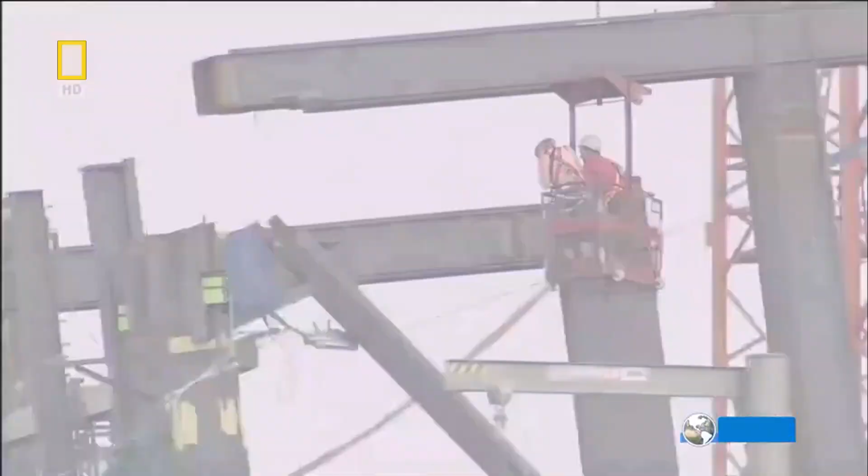Berlin, Germany. A construction team races to finish the largest train station in Europe before next summer's World Cup comes to town. To meet this deadline, 2 massive steel towers must be tipped over their new glass station in under 3 days. It's an engineering feat never before attempted. Can this team of engineers get this daring plan to work?

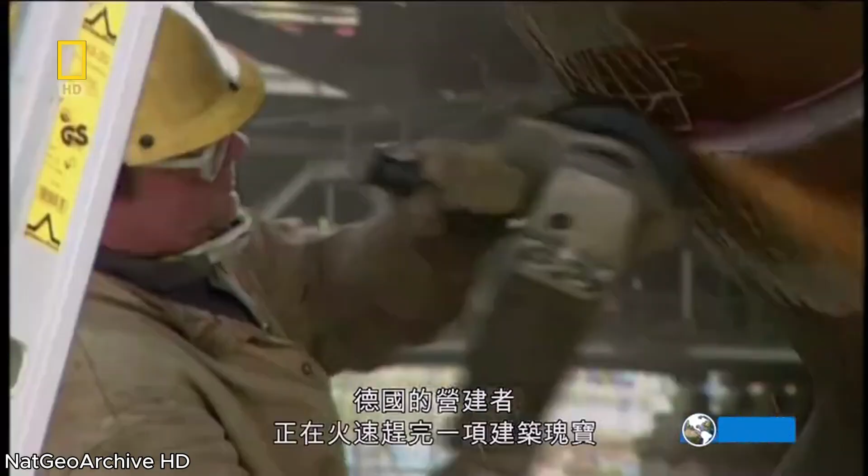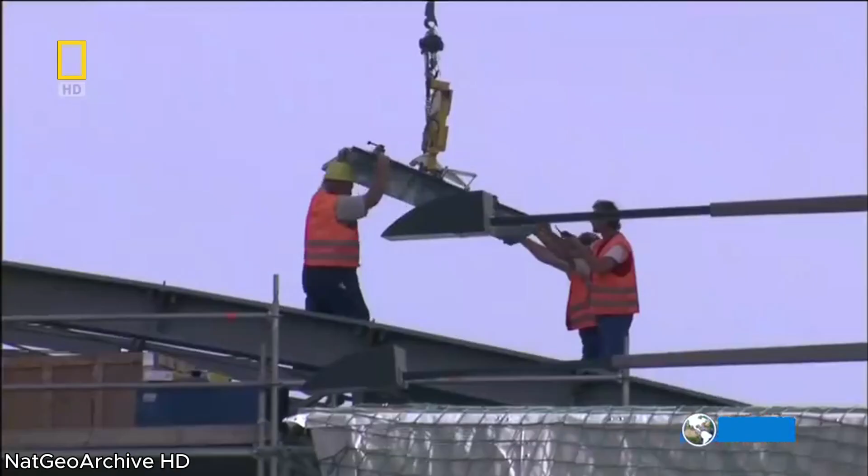In Germany, builders are racing to complete an architectural crown jewel. They've labored for over a decade, confronting one disaster after another. When finished, this will be the largest train station in Europe. 7 levels containing a staggering 180,000 square meters of space. Nearly as much space as the Empire State Building.

Even more amazing, 2 office buildings will straddle the station, both standing 14 stories tall, with 4-story high bridges suspended just above the glass and steel roof of the station. The price tag? Over 4 billion euros and counting. Financed by the Deutsche Bahn, the German rail company and the government, and designed by a world-famous architect, the project is intended as a bold statement. If it works, it will literally and figuratively reconnect East and West Germany, ushering in a new era of unification.

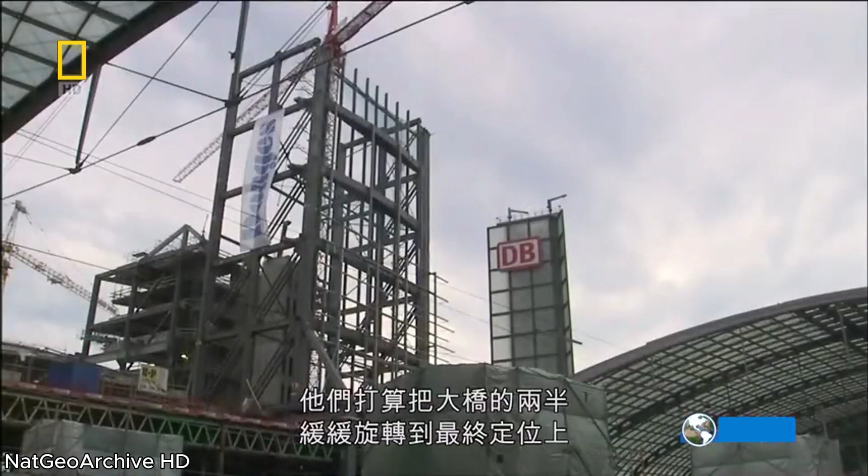But the project has faced terrible setbacks. It's years behind schedule and billions over budget. To make matters worse, the architect is suing the developers for cutting corners on his design. Soon, the project will be coming to a head. The builders are about to execute a move never before attempted in the history of construction. They will attempt to gently pivot these 2 massive halves into their final position, forming a steel bridge just 2 meters above the station roof.

It's a terribly risky scheme. If anything goes wrong and the bridge sections hit the glass roof below, the project would suffer unthinkable damage, and the cost would go up by more millions. Will Berlin's new central railway station ever be finished?

Since the 1989 fall of the Berlin Wall, Germany's capital city has undergone a frenzy of rebuilding in an attempt to reclaim its historical place as the cultural and economic center of Europe. What better way to solidify that role, planners thought, than with a truly world-class rail station? As the centerpiece of a completely rebuilt transportation system, the station would not only relink East and West Germany, but all of Europe, by connecting Paris with Moscow and Stockholm with Vienna. Berlin, of course, would be at the center of it all.

But today, 5 years after its original scheduled completion date, the project is still under construction. And it's reached a critical moment. Down on the streets, crowds begin to form. They've come to watch an unfolding drama. A milestone event in the history of construction engineering. The fate of the entire project hinges on this step.

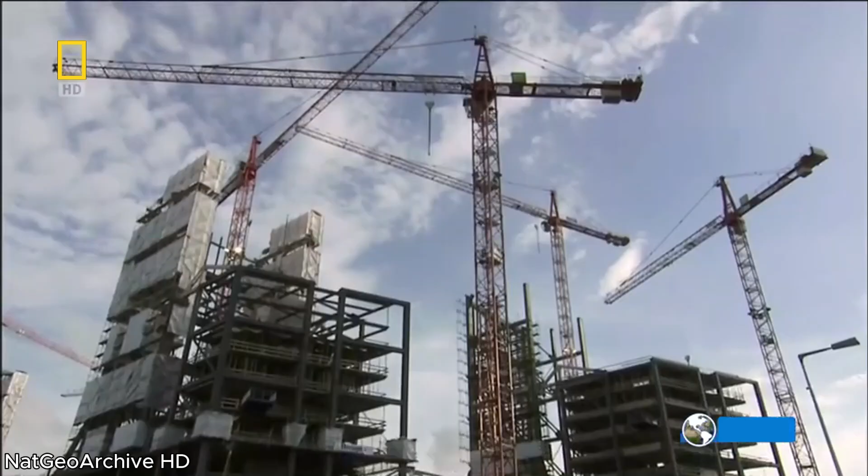Up in the air, a team of specialized engineers and workers are preparing to execute a dangerous maneuver. Scaling the steel like mountain climbers, workers make their final adjustments. Check and double-check hundreds of details. All eyes are now focused on a pair of huge steel bridge sections. When finished, they will form a bridge, 4 stories high, hovering just above the roof of the train station. The bridge will join the 2 sides of the office building and will itself contain thousands of meters of office space.

Because building a working train station was the top priority for builders, the twin office towers would have to be built after trains were running through the nearly completed station. One of their original ideas called for building the bridge the usual way, starting at one side and building out horizontally over to the other. But engineers realized that building the bridges that way was too dangerous. Safety officials lay awake at night at the thought of cranes swinging these huge steel girders above their new glass-roof train station, packed with thousands of commuters. They'd be forced to shut down train services over 6 weeks until the bridge was done. But that would have brought Berlin to a standstill.

So engineers came up with a remarkable solution. They would build the bridge in halves. Each half was built not out, but up. Now the 2 halves are ready to be lowered into place with cables. The tipping technique has never before been used in an urban setting. But now, there's no turning back.

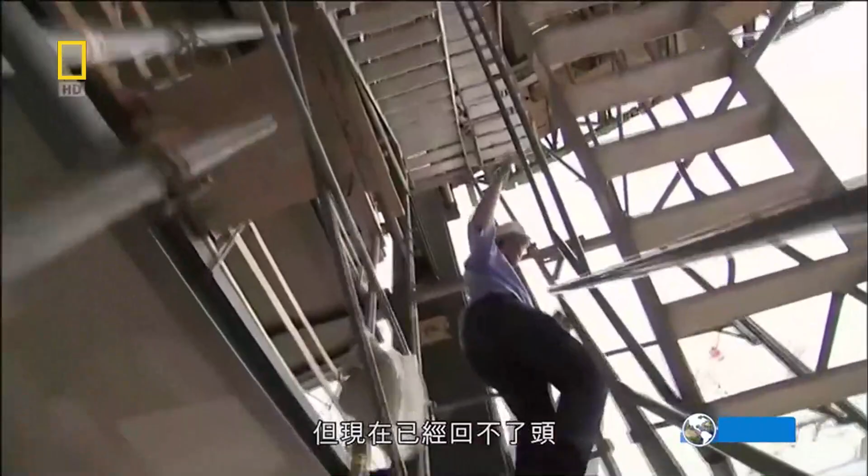Starting at 10 tonight, train services through the station will be halted. But only for the weekend. They'll have 54 short hours to get the bridge lowered and the sections attached. But each section weighs over 1,200 tons. If something goes horribly wrong, it could mean the total destruction of the station's spectacular new glass roof. It has one of the largest glass roofs in Europe.

Over 11,800 individual square panes. Each pane weighs almost 100 kilograms, bringing the total weight of the glass alone to 1.2 million kilograms. That's a lot of glass.

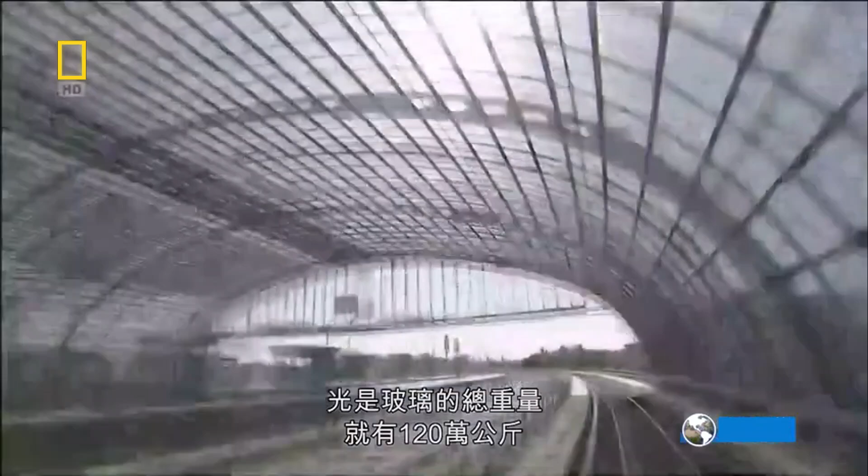World-famous architect Meinhard von Gerkan knew from the beginning that he wanted glass to play a prominent role in the station's design. The most important thing for a public building is to have the impression of daylight. You feel much better if you are part of the total environment, the natural environment.

As it happens, big glass structures are all the rage in Germany right now. When the Reichstag, the German parliament, was rebuilt in 1999, the government insisted on installing a glass dome on top to reflect the new German transparency. Glass has traditionally been a material of choice for train station designers, but it's always been expensive and tough to work with.

Early train stations with glass also needed immense support structures of steel to hold up all that heavy glass. The result, in spite of the glass, not much natural light could get in. The stations were still pretty dark. Von Gerkan wanted to do better.

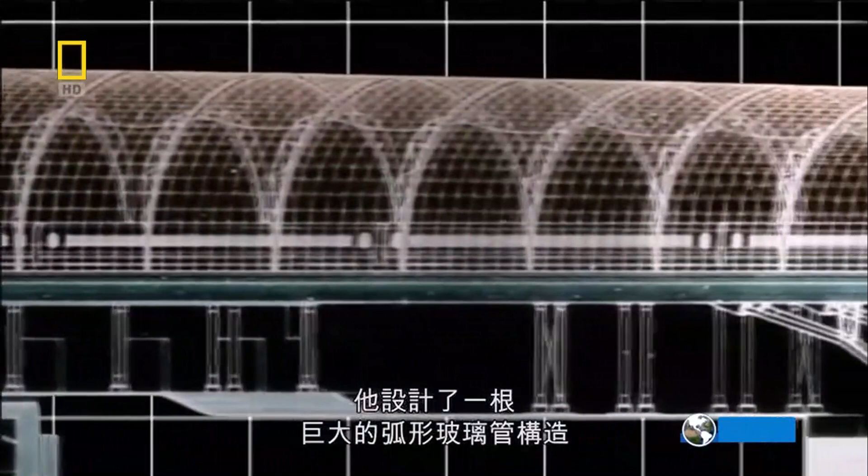His design called for a massive curving glass tube, 16 meters high, 60 meters wide, and over 400 meters long, to form a nearly transparent roof and walls for the main platform. He needed to find a way to eliminate all that steel, to have the glass support itself, or at least appear that way. But a glass structure can be as dangerous as it is beautiful.

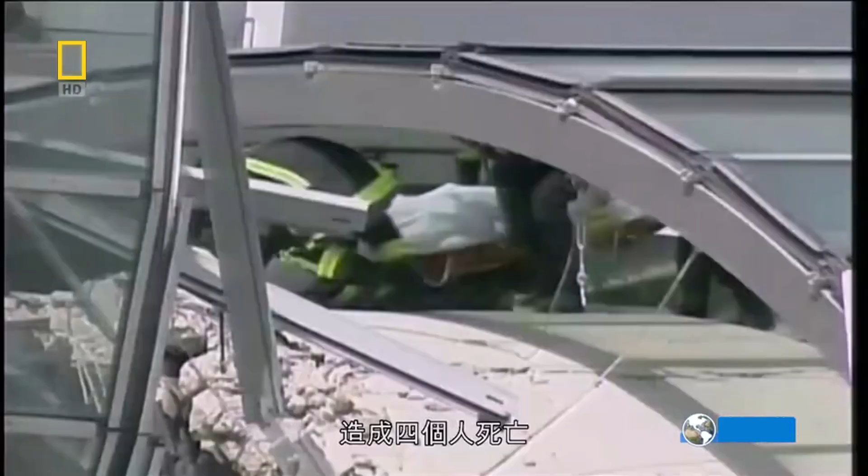In 2004, almost a year after its opening ceremony, a brand new glass terminal at Paris's de Gaulle airport suddenly collapsed, killing 4 people. Investigators pointed to both design flaws and construction defects.

Now, with just hours to go before the crew here in Berlin attempt one of the most unorthodox construction tricks in history, the possibility of disaster cannot be far from anyone's mind. It is the ultimate challenge for a project that has missed one deadline after another. Today, a new deadline looms, and the teams know they can't blow it.

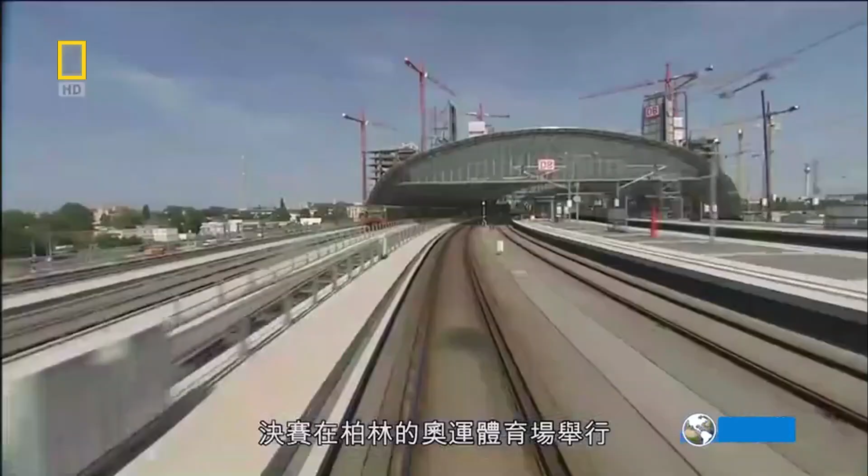Mid-next year, the World Cup football tournament will focus the world's attention on Germany, the most watched sporting event in the world with an audience of billions, more than even the Olympics. Millions of fans from across the globe will flood into Germany, with the final game here at Berlin's Olympic Stadium. City officials desperately want the global event to also serve as the station's inauguration.

Berlin officials expect up to 3 million football fans to descend on the city. They desperately need the station completed, because once the games begin, nearly 500,000 fans will use it every day. If the project is still under construction, it will be a huge embarrassment for the country in front of an international audience.

All this pressure now sits squarely on the shoulders of the two men in charge of the operation. Olaf Severin will run the crew lowering the South Tower. Bernd Naujoks will lead the North Tower team. They go over the plans one last time. Years of preparation have led up to this weekend.

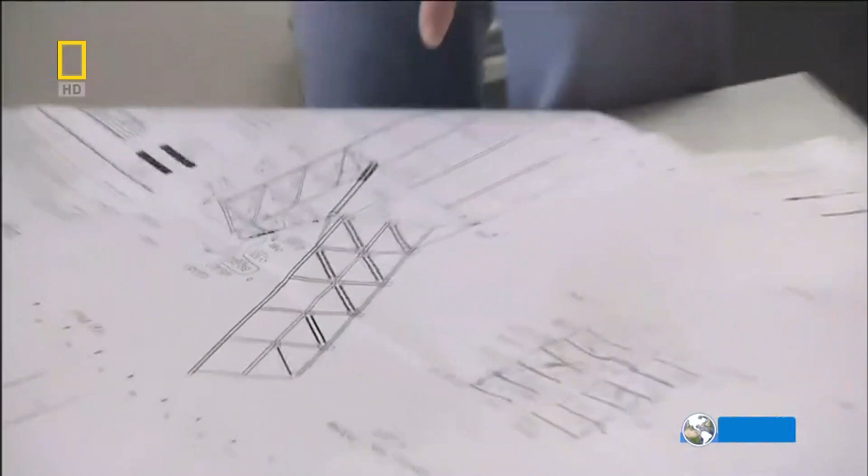At 10 tonight, all train traffic through the station will be halted. Olaf and Bernd must complete the work by 4 a.m. Monday, the start of rush hour, when the train schedule must resume. If they're late, Berlin becomes one huge traffic jam. Between now and Monday, neither one of them plans to get much sleep.

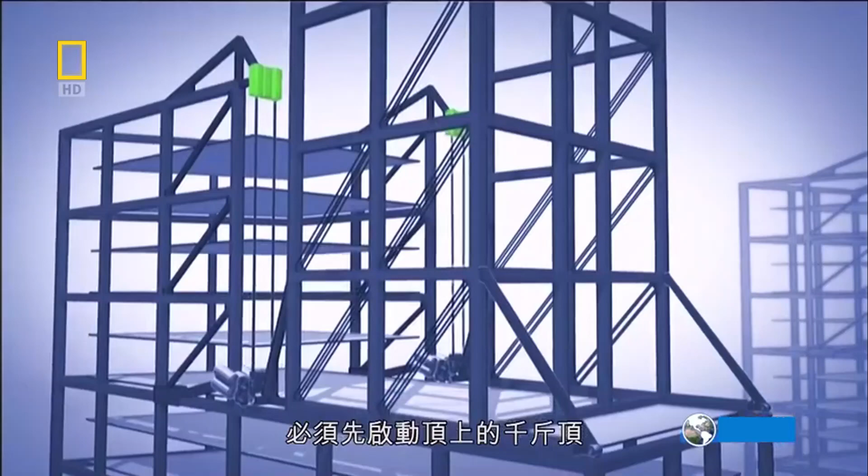On paper, the plan is simple. Each bridge section currently stands on its end. Both towers are fitted with 12 massive jacks, 4 on top and 8 on the bottom. To begin tipping the sections, the men will first activate the top jacks. These jacks pull up on a series of steel cables anchored to the tower, tipping the tower on a single pivoting hinge.

Once it reaches an angle of 15 degrees, it will start to fall. To keep it from crashing down, the bottom jacks are now activated. These jacks act as a brake, lowering the tower by slowly letting out a second set of cables, centimetre by centimetre. The two sets of jacks share the load until the bridge sections reach an angle of about 40 degrees. At that point, the bottom jacks take over completely for the rest of the ride.

A simple plan, but with years of experience, Olaf knows problems could spring from any direction. Snapped cables, misfiring hydraulics, high winds. So computers are on board to control the process. They can monitor the shifting weight, regulate the speed of the jacks, and shut down everything if they sense a problem.

Olaf and Bernd share final authority, and each of them knows that if they have to, they can override the computers. The two decide to make a bet on who will get to the bottom first.

One thing's for sure, Bernd. We will reach the bottom first. What? No. Let's bet a case of beer.

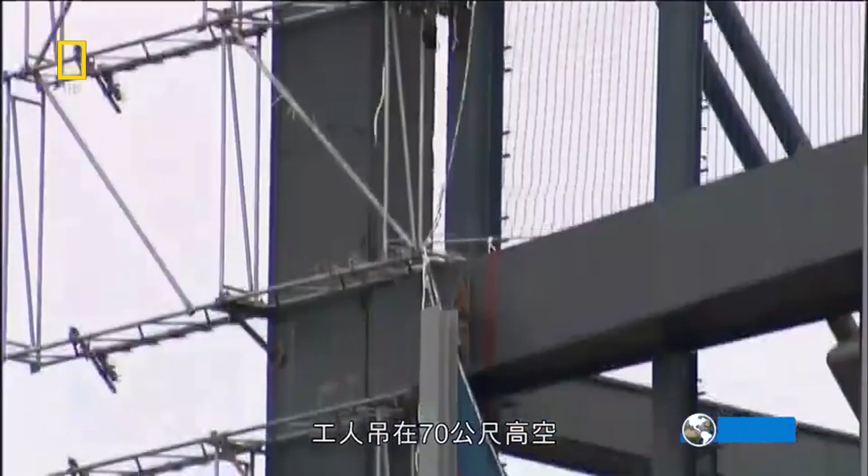But before the starting horn can sound, final safety measures must be finished. Workers dangling 70 meters in the air attach nets to the bottoms of the bridge sections.

The nets are supposed to protect the nearly 12,000 glass panels of the station roof, in the event that something falls from one of the sections during the tilt. Glass has been used in train station roof construction for over a century. But early builders were limited by the expense and fragility of glass. So builders kept both the size and the quantity of the panes they used small.

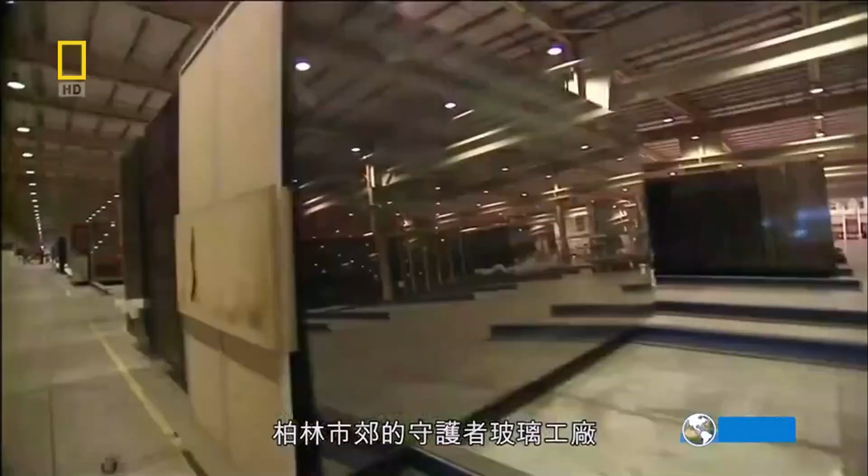Architect von Gerkan's design for the new Berlin station called for nearly 12,000 panels, each over a metre square. For such a vast quantity, project managers came here to the Guardian Float Glass factory just outside Berlin. Virtually all of the glass used in the station was manufactured here, using a modern method called the float process.

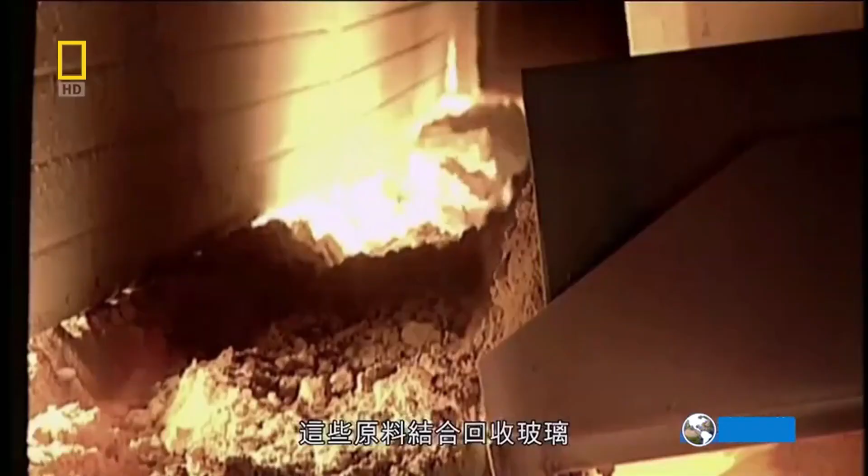Today's high-quality glass is made from a blend of raw materials, including silica, soda, and lime. These ingredients are combined with recycled glass and fed into a huge furnace. The furnace is heated to over 1500 degrees Celsius, hotter than volcanic lava. So hot, workers can only keep watch through tiny windows, wearing heat-resistant clothes and goggles.

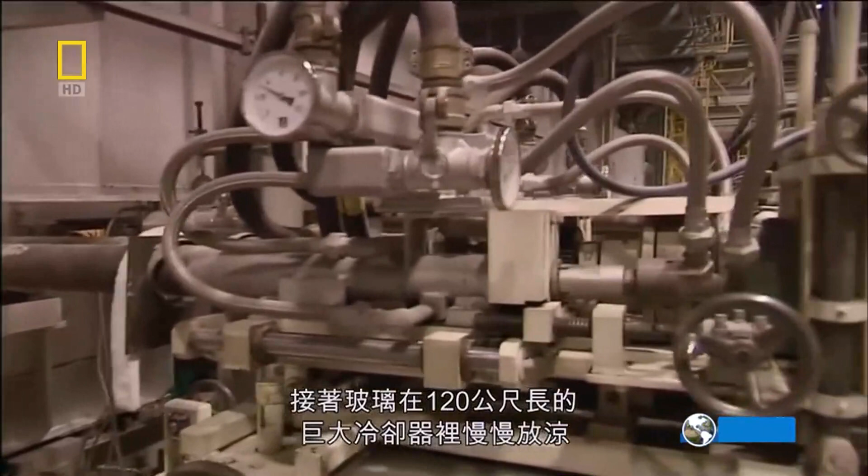The extreme heat inside the furnace melts the ingredients into a liquid glass. The glass spreads out over a layer of molten tin. Because the plane of contact between the two liquids is perfectly flat, the resulting glass will be virtually free of optical distortion. Next, the glass is slowly cooled in these 120-meter-long giant coolers.

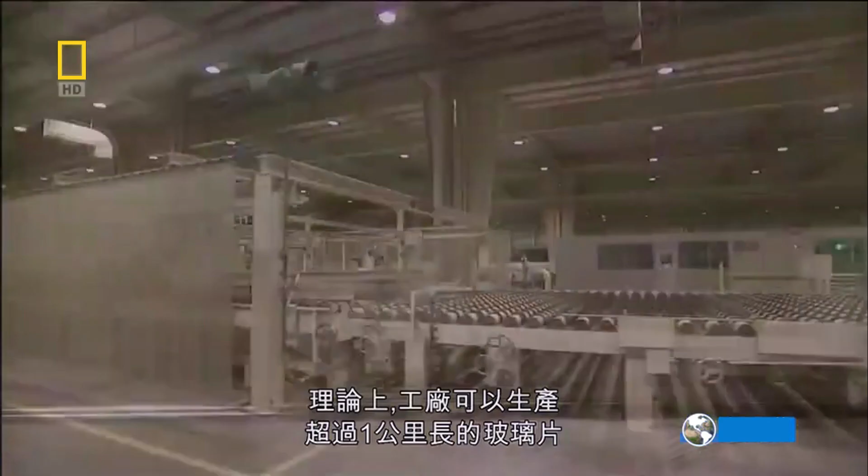This factory could theoretically produce glass sheets over a kilometer long, but they would be essentially impossible to ship. So each piece is then scored, cut to size, and trimmed.

But the glass panels von Gerkan needed for the train station needed to not only be large, but also extra strong, capable of withstanding bad weather and the constant vibrations from trains. So the glass for the station is tempered to make it twice as strong as normal window glass. As a final step, a layer of UV-absorbing material is fused with the glass. This step helps prevent the station from becoming the world's largest hothouse.

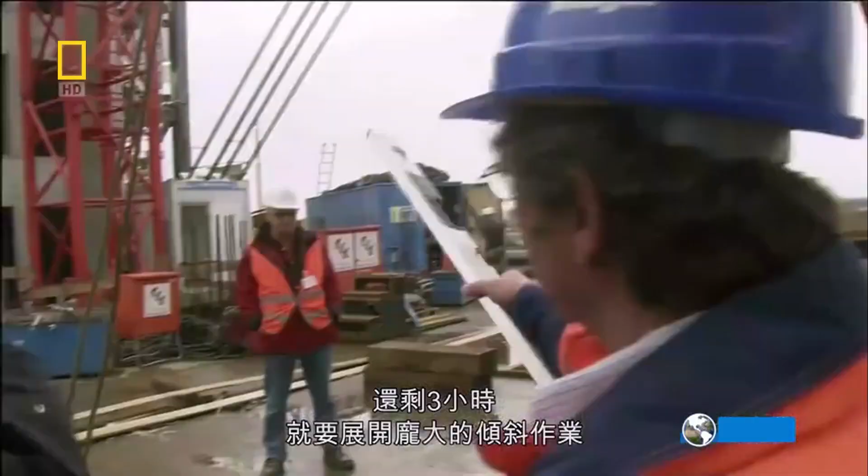Back at the construction site, there are only 3 hours left until the big tip-over is supposed to begin. Team leaders Olaf and Bernd are anxiously awaiting the signal that train traffic through the station has been halted so that they can begin the delicate operation. But now there's a new worry. The skies over Berlin are looking ominous, and severe thunderstorms are forecast. The two men know they must do everything they can to stay on schedule. The trains can only be stopped for 54 hours.

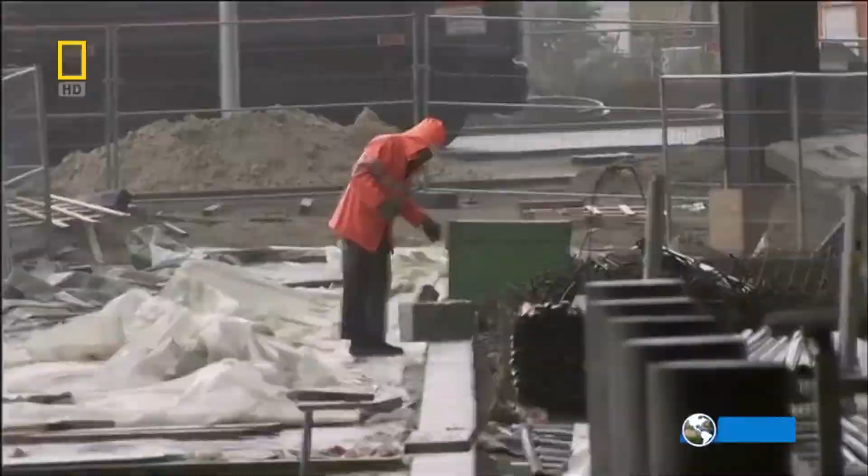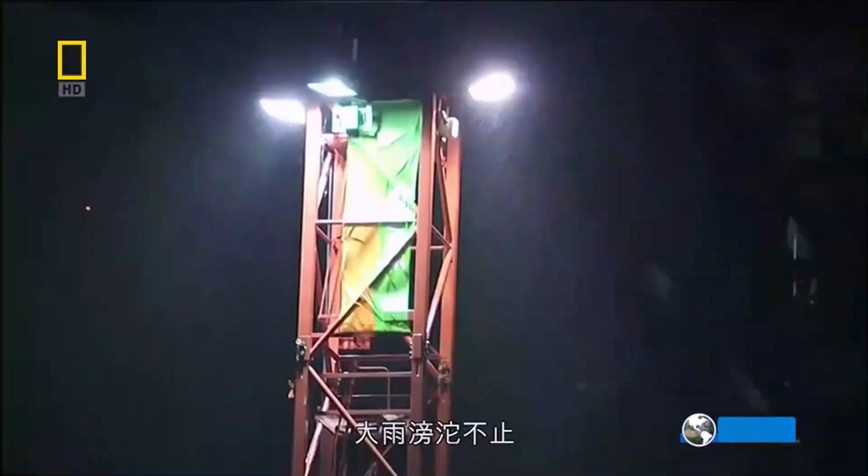But they can't put their men at unnecessary risk. If the conditions get too bad, they'll be forced to call off the procedure. As night falls, there's nothing to do but wait and hope that the storm blows over. 10 p.m. at the construction site of the massive Berlin rail station, and lightning is lighting up the sky all round. Rain is coming down in sheets, but the wind seems to be holding, so engineers make the difficult decision to proceed.

Lightning should not be a problem. The wind is starting to increase, but our static calculations consider such wind loads. After the last train leaves the station, the starting horn blares. Foreman Bernd gives the signal, and his North Tower team springs to action.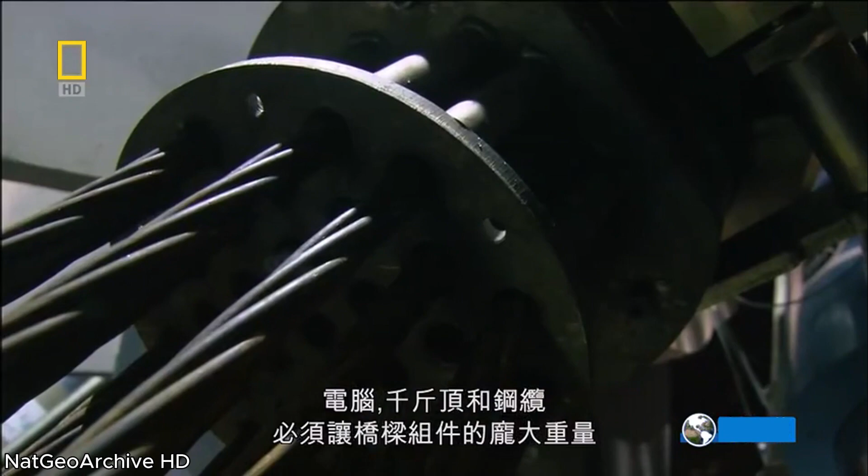The name of the game in this entire process is control. The computers, jacks and cables must keep the massive weight of the bridge sections under constant and complete control for the entire tilt. If they don't, the sections could jerk or start to sway, which could be disastrous. Of course, gravity will be doing most of the work. All the machinery and all the men are here simply to keep gravity from working too fast.

The scariest point will be the moment when the center of gravity shifts on the bridge sections. At that moment, the 12 jacks and nearly 400 cables will be pushed to their limit as they carefully lower the 1,250-ton weight of each section over the station. If the team can get past that changeover point smoothly, the rest of the ride down should be easy. The operation is the first time in construction history that two massive towers have been intentionally tipped over so much glass.

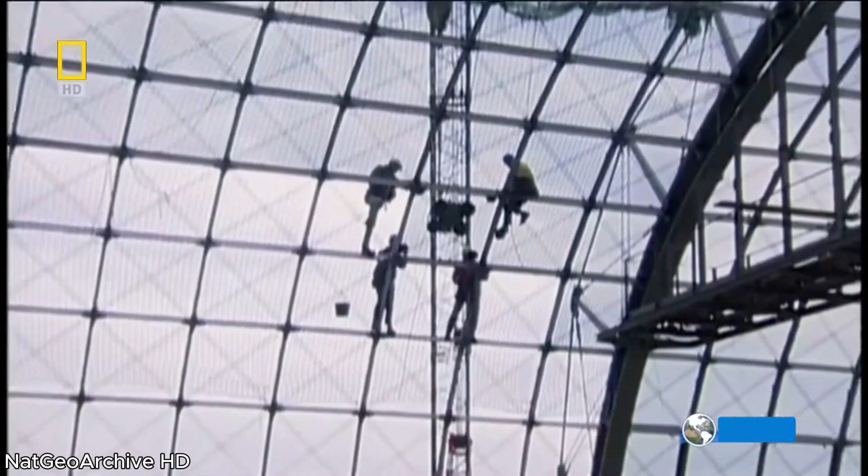It's taken months to place the thousands of glass panels. Each panel sits inside a perfectly sized steel square frame. This interlocking steel framing matrix is a crucial element of the design because the steel itself is so thin it almost looks like the glass is supporting itself. Architect von Gerkan wanted the station flooded with light, so he needed to find a way to hold up the glass with as unobtrusive a support structure as possible.

And he could not sacrifice safety. The structure needed to hold firm against constant vibration from the trains rumbling through below. Hundreds every day. Von Gerkan also wanted to avoid cluttering up the interior of the station with traditional support posts. So project engineers came up with an ingenious solution. An elaborate skeleton of external supports.

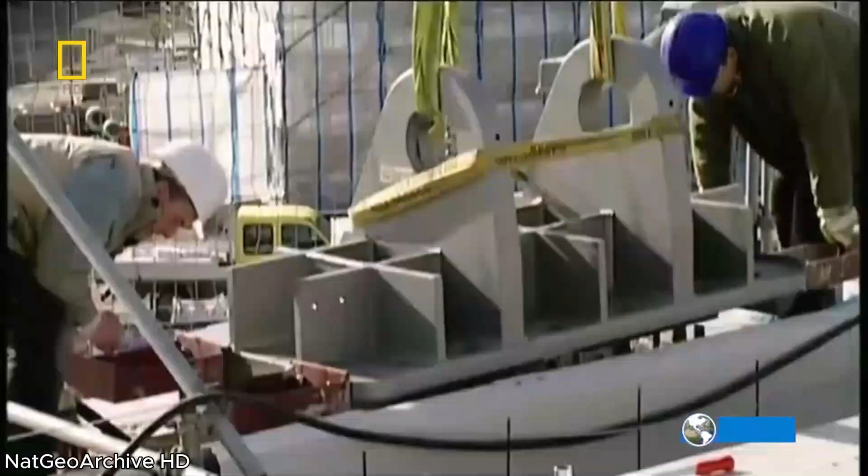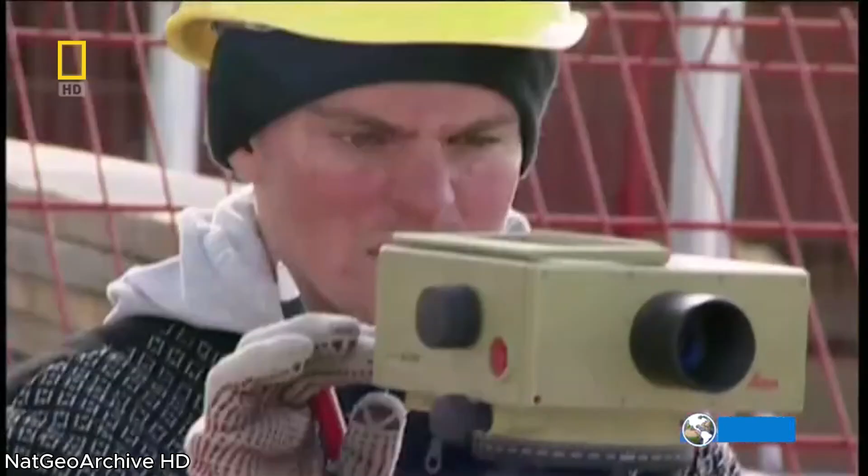This steel anchor joint weighs 4 tons, nearly as much as 2 SUVs. It's one of 46 identical anchors that, when placed and bolted, will serve as the primary support for the entire glass and steel lattice above. Each joint will be capable of holding almost 200 tons. Placement is critical. A surveyor carefully guides the team. Once the anchor joint is secure, cranes lower one end of an 11-ton end section of one of the station's arching main support beams.

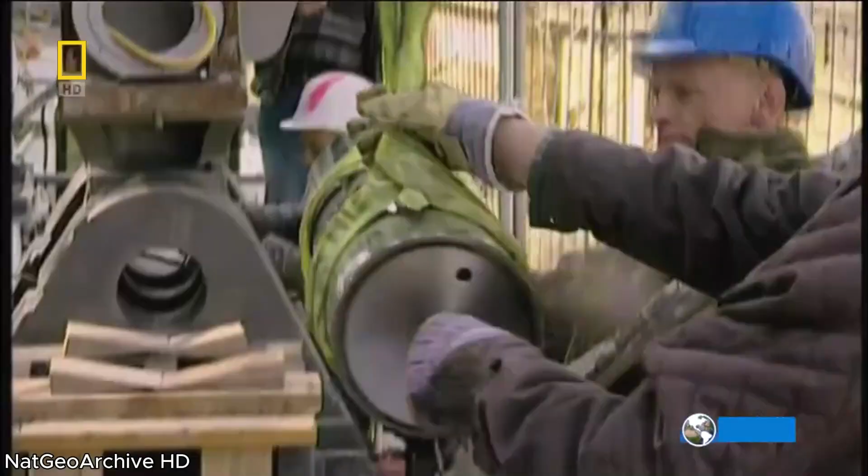It's not unlike the world's biggest door hinge. First, the crew carefully aligns the holes. Then a 300-kilogram steel locking pin is slid through the holes. This hinged joint will let the huge beam sections rotate as needed during construction. They will also let the entire structure expand and contract without creating wear and tear on the joints.

Once this end of the beam is locked into its anchor, the other end can be placed into an identical facing anchor on the other side of the station. Each complete beam is made up of 4 interlocking sections. The steel and glass latticework hang between these mammoth support beams.

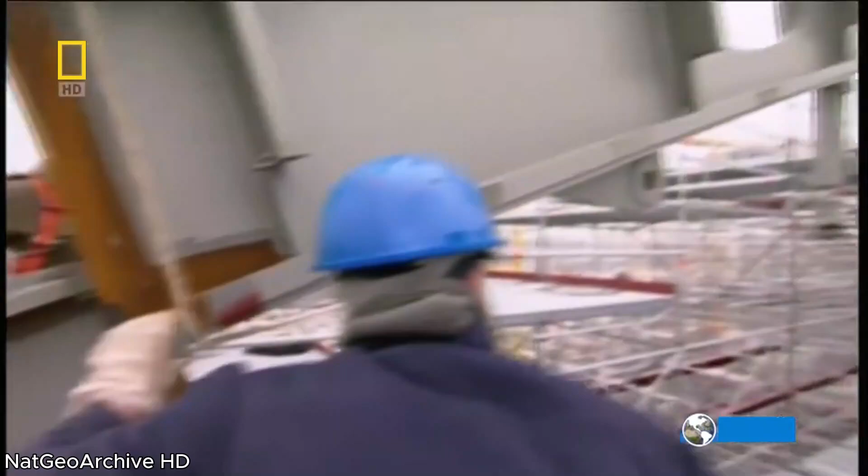After the last beams of the steel support arches are placed and welded, it's time to install the glass. Cranes specially fitted with suction cups gently lift one pane at a time to the crew. This part of the job requires calm hands, a steady nerve, and a delicate touch.

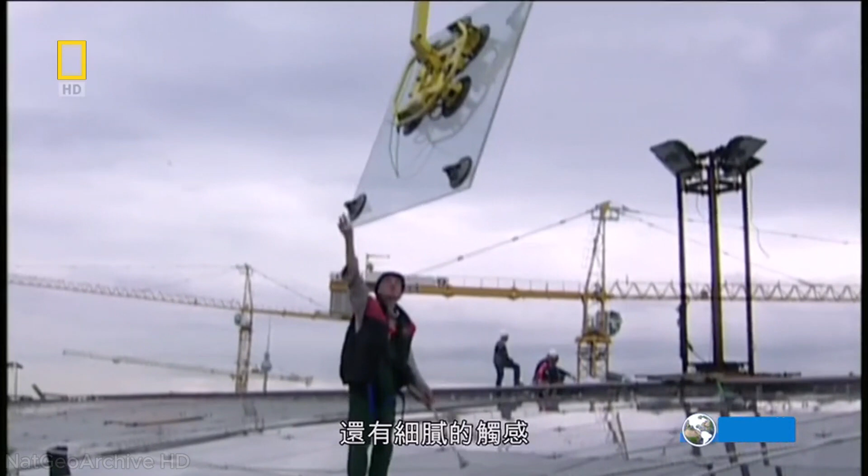Working 16 meters above the tracks, workers must stretch to receive the glass, and then stretch again while they dangle over the open steel frames. A spritz of glue, and the pane pops in. It took the crew working day and night for 4 months to install the glass to this point. Today, only a 9 square meter section remains to be glassed.

And while it's been all sorts of fun, nobody here relishes the thought of having to repeat this process. And that's just what they'd have to do if this station roof winds up getting smashed to bits by an out-of-control bridge section.

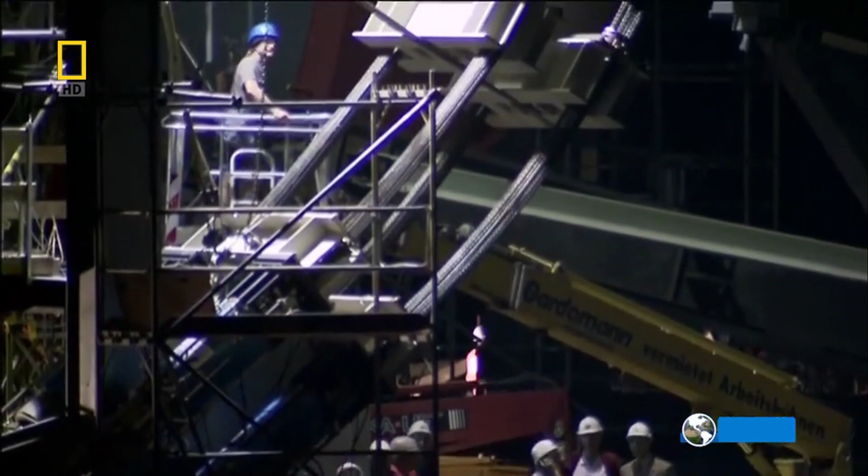Back at the tip-over, workers wait for the signal to start. Bernd calls from the control room. They flip the switch. The huge jacks spring to life, and the massive towers begin their slow descent, 6 meters an hour. As rain pelts the station, and all train traffic through the station remains stopped, workers check and recheck the tower's progress.

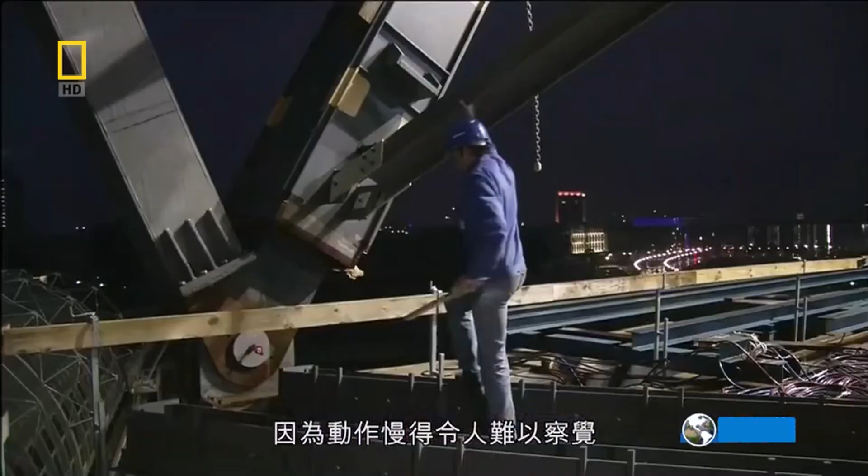Since the movement is almost imperceptibly slow, a simple ruler and bubble level provide assurance that the huge sections are indeed moving at all. Bernd's North Tower takes a slight lead.

One of their main concerns, the cables. If a cable binds or gets stuck for any reason while going through the jacks, it could cause the steel to jerk and sway. So workers armed with lubricant will keep that cable well oiled all night. Their crazy plan seems to be working.

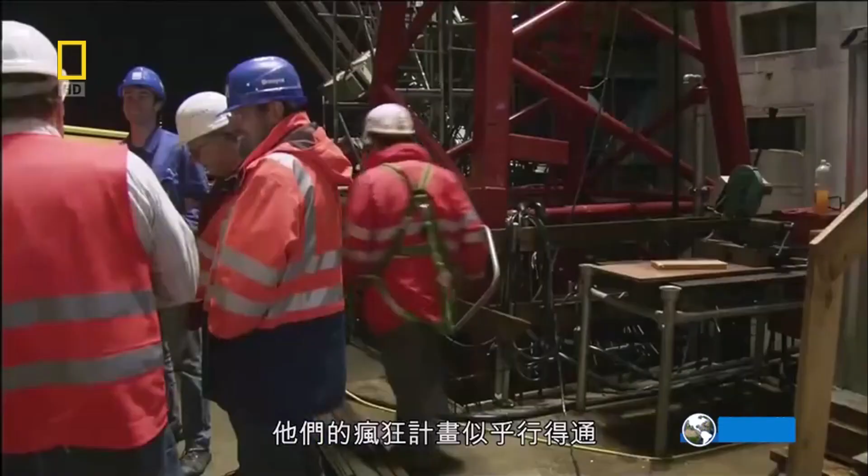Then suddenly, less than 2 hours into tilting, a problem erupts for Bernd's North team. The electronic signal coming from one of the jacks suddenly stops working. Without a signal, the emergency system kicks in. Tipping on the North Tower is automatically halted. Now it's a race against the clock and the weather.

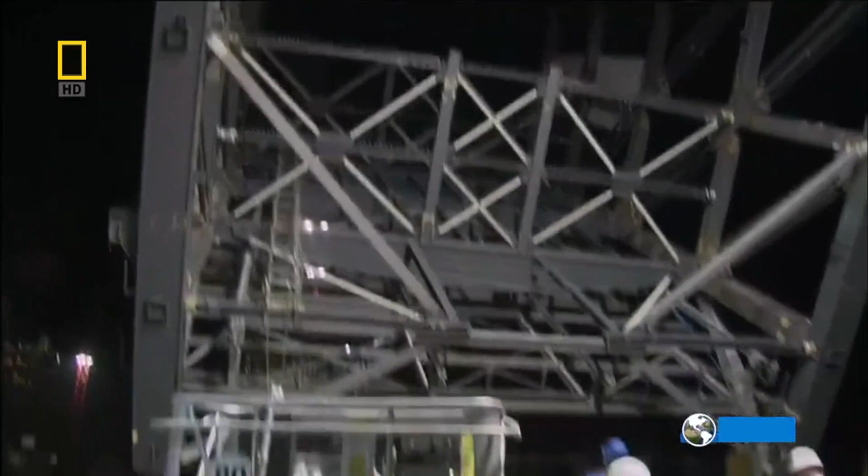Three hours ago, tip-over came to a sudden halt when communication between one of the jacks and the control room was lost. When working, the signal allows the computers to control the tower's every movement. Technicians believe the heavy rain shorted the line. It could take hours to fix.

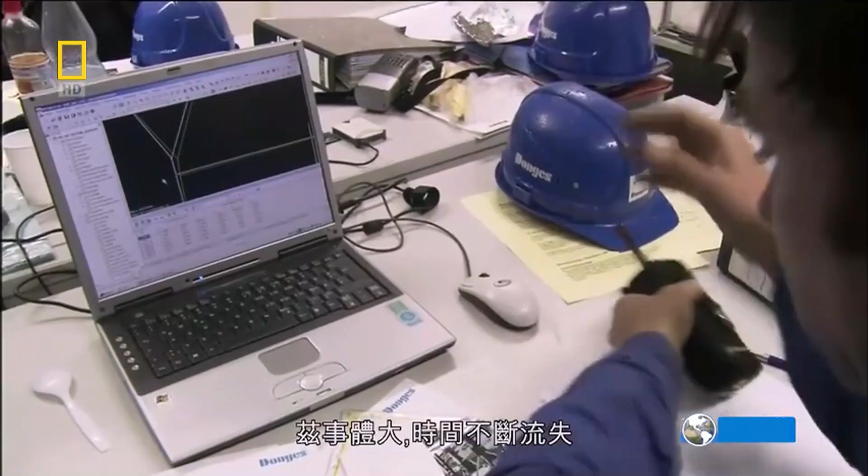Back in the office, team leader Bernd Naujoks makes a bold decision. With so much on the line and the clock ticking, he decides they can't wait for repairs. He tells his team to fire up the jacks once again.

Without the precise monitoring of the computers, engineers must monitor every centimeter of the tip-over, manually, with surveying tools and levels. One more job for an already overtaxed crew. Even the slightest miscalculation could spell disaster, but it's a risk Bernd feels he must take. Just another crisis for a construction project that has been plagued with problems.

From the beginning, one of their biggest problems was the location. To most people, these scenes are reminiscent of Venice. But this is Berlin. The city is built around 2 main rivers and countless smaller waterways. The water adds charm to Berlin, but it adds all sorts of complications to builders' plans. When you build a billion-euro mega train station, it's all about location, location, location.

The chosen location for the new station had once been the site of a majestic train station called the Lehrter Bahnhof. But that station suffered irreparable bomb damage during World War II and was then demolished in 1959.

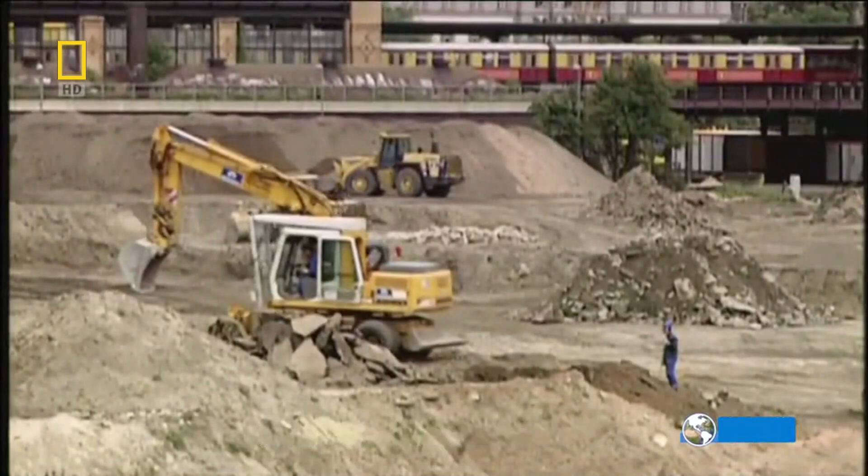In the early 1990s, when planners first came here, only a small local train terminal stood on the grounds. The land for the new station was vast and centrally located, right in the middle of Berlin. The perfect spot. But big problems popped out at engineers immediately.

The ground beneath the site, along the bank of the Spree River, was mainly composed of fine sand. While the site was adequate for this small terminal, the new station would be several times larger. Nothing that large could ever be built on top of this sandy site, and that wasn't the only problem. The ground was also extremely saturated with water, making the construction area even less stable.

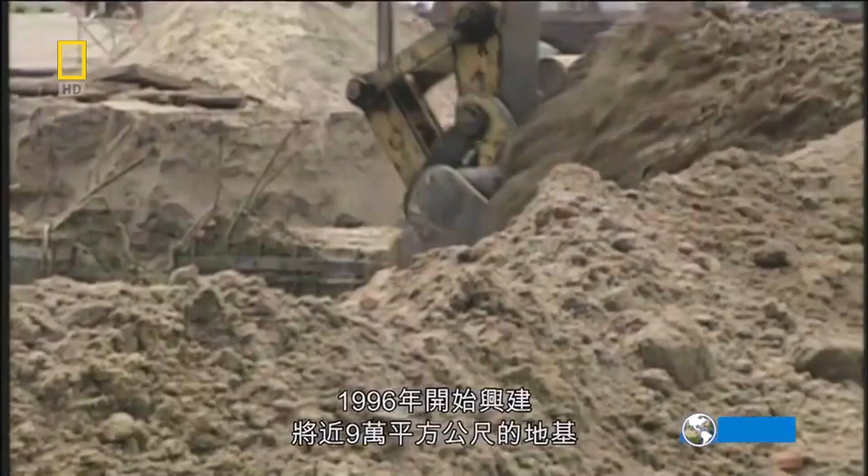Engineers needed to not only build a solid foundation, the size of 11 football fields, across this sandy area, but also construct the 2 lower floors of the station below the groundwater level. In 1996, construction began on the 90,000 square meter foundation and the lower station floors. To do this, workers first boxed in the massive area with waterproof walls. The 1.5 meter thick concrete walls extended down 25 meters below the surface.

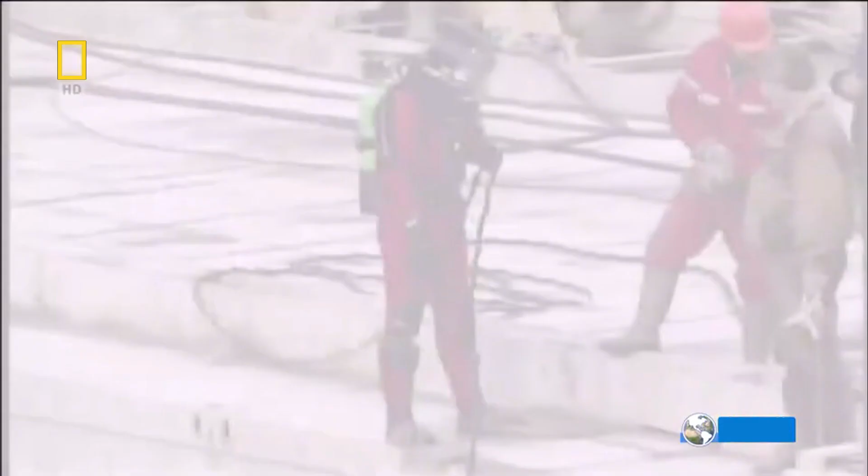Excavators then shoveled out the earth between the walls. As they removed the dirt, the groundwater filled in. Once they excavated to a depth of 20 meters, they poured a 1.5 meter thick concrete floor under the water. Divers then reinforced the concrete corners, making a watertight box.

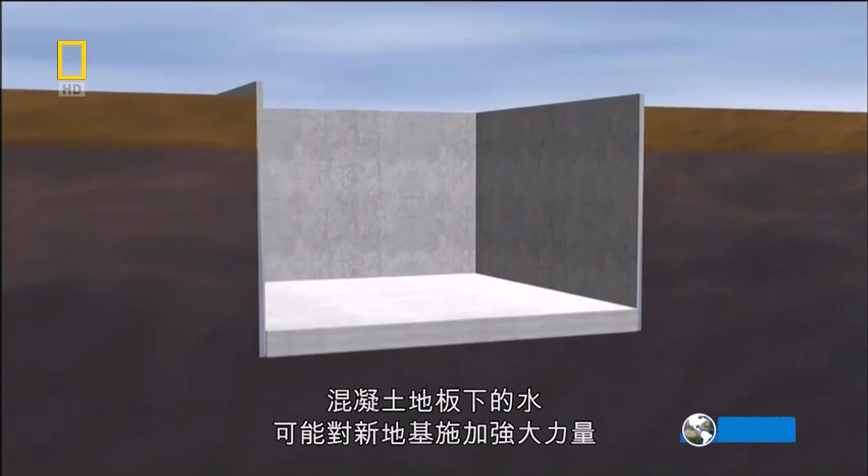The water left in the box was pumped out, but without the water in the box to equalize the pressure, the water below these concrete floors would exert a tremendous force on the new foundation, 20 tons per square meter. This pressure would cause the floors to pop like a champagne cork. To prevent this, the floor was held down by a series of long steel piles, almost 30 meters long. With these huge spikes holding the foundation firmly in place, the rest of the station could be built.

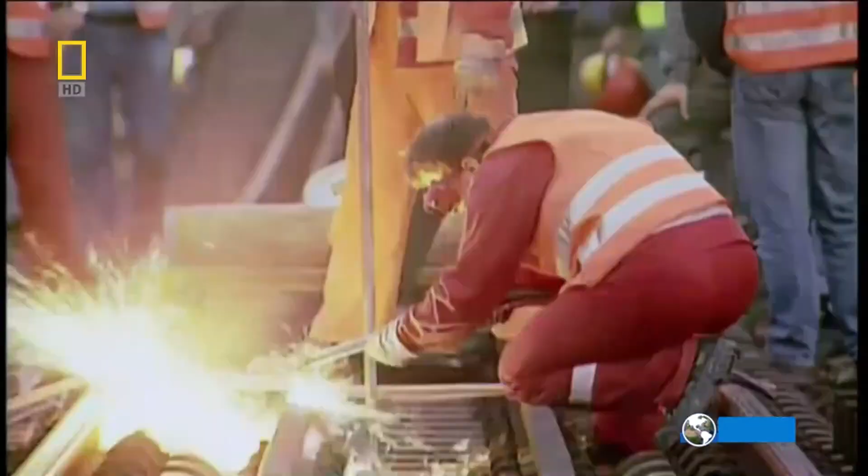Bridges and support beams could be erected, and tracks laid into position. But a big question still remained. Would it hold up the trains? Engineers had to be certain their glass-domed station sitting on a bed of water and sand could hold up under constant pounding. A train weighs about 800 tons, or as much as 300 pickup trucks, running over the bridges and supports over 50 times an hour.

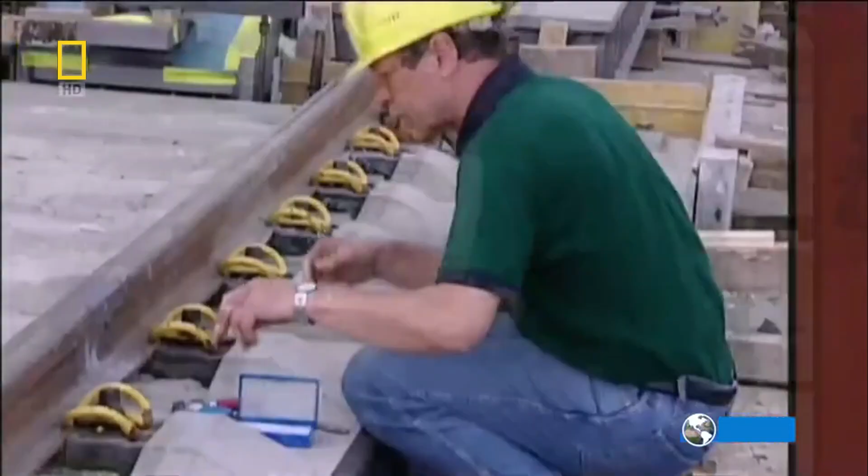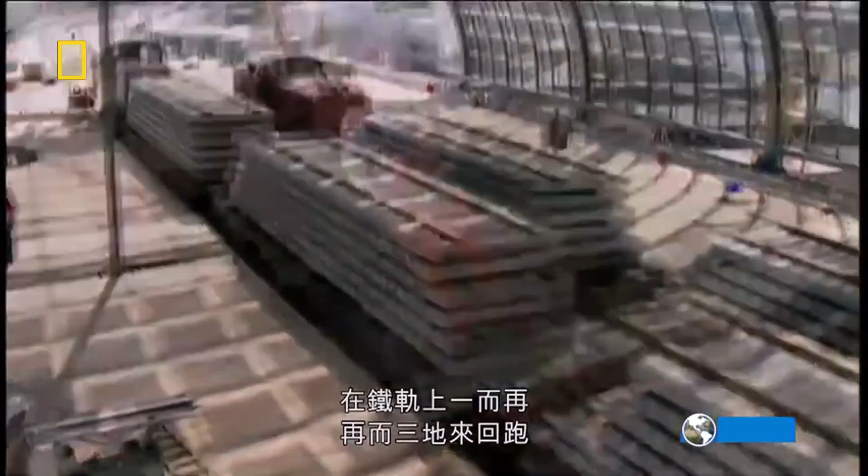So the station was put through a rigorous battery of tests. Motion sensors were attached in key areas throughout the station, on the bridges, the supports, and along the tracks. Then they called in the big rigs. Trains weighed down with over 40 tons of concrete slabs, running over the tracks, over and over and over again. Measurements were taken all along the track and fed into a master computer.

The station was designed to be flexible, but if it shifted by more than 5 millimeters, they would need to shut down until it could be reinforced. When the final readings were measured, the station held up. It was ready for trains. In July 2002, the media came out in force to watch the first train to ever run through here. But no one was calling this station done.

Today, the pressure to get it done sits on foreman Bernd Naujoks. Since he made the daring decision to restart the tipping of the North Tower, without the computer signal from the jacks, his tower is once again slowly lurching forward, tipping 6 meters an hour. Bernd's big gamble seems to be paying off. He only hopes it stays that way. It's been a long, sleepless night for workers attempting to tip 2 megatowers at Berlin Central Station. And no one is sleeping now.

Foreman Olaf Severin's South Tower is about to reach the scariest stage of tip-over, when it reaches a 30-degree angle. At that moment, the center of gravity starts to shift on the bridge sections, slowly switching the burden of the tower's weight, all 1.3 million kilograms, over from the upper jacks to the lower jacks and cables. The jacks must maintain equal tension on either side of the tower. The delicate balancing act continues until about 40 degrees, when the upper jacks will no longer be assisting the tip over. If it isn't executed perfectly, this tower could start to swing out of control.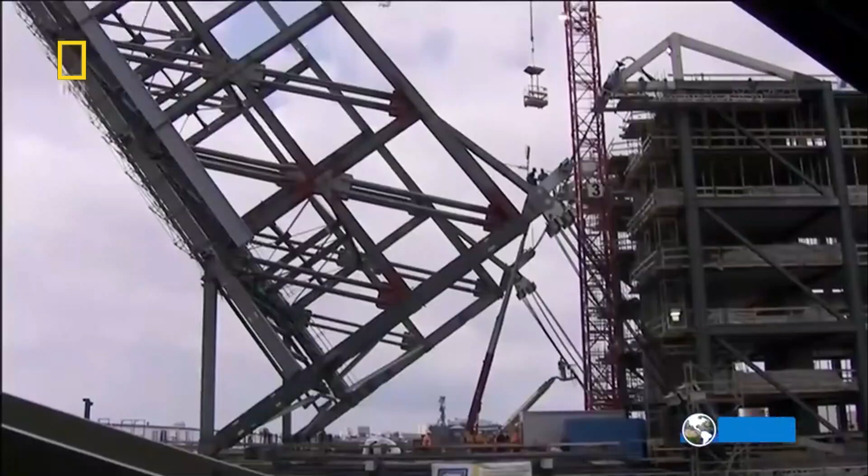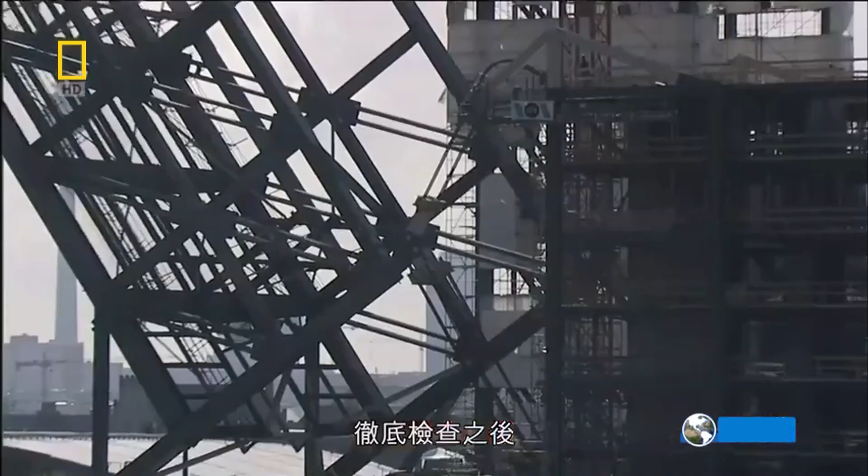As the South Tower reaches the critical angle, a team of surveyors starts computing some of the most important data of their lives. Bleary-eyed from lack of sleep, they work quickly, checking their predicted calculations against what they're actually seeing. After checking everything, the tower's angles are all within the acceptable range. They believe the lower jacks and cables are ready to hold the entire tower.

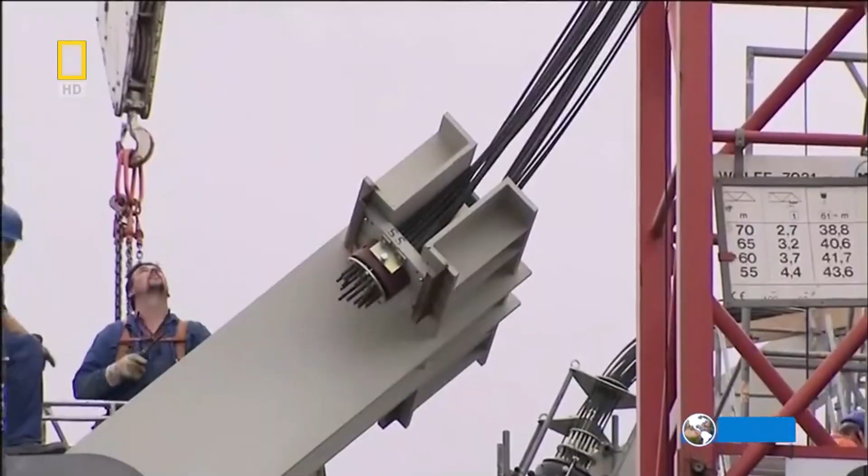Olaf stops the tipping. Over 1,200 tons of steel and concrete dangle above, held in place by nearly 400 steel cables. The 4 upper jacks are no longer needed. So 3 workers crawl up to take them apart and remove their cables.

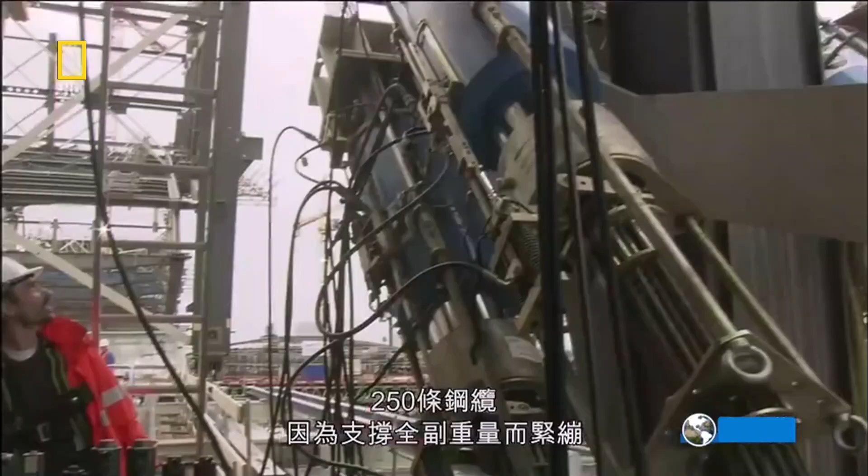Now just the bottom jacks remain to lower the massive tower, weighing more than 6 jumbo jets. The starting command is given. Pumps hiss, jacks groan. 250 steel cables strain from holding up all that weight. The surveyors and engineers keep vigilant watch. But the cables hold. It should be all downhill from here.

Down on the street, a crowd has formed to watch the show. This guy thinks they're doing it all wrong. On this side, the ropes are slightly loose. I don't know if everything's been thought through.

12 stories above, the North Tower just passed through the critical switchover stage unscathed. Since making the daring decision to tip without computer monitoring, Bernd's team has managed to make up some lost time. If they keep at this pace, they'll finish ahead of their deadline, but still behind the South Tower. I have to get going and buy the beer. I'm afraid I'm having difficulties catching up with Olaf. But they'll need to settle their bet later.

Because they're about to reach the final tip-over stage, when the two towers are brought together, forming a steel bridge. Like giant puzzle pieces, the North Tower was built to mount into the South Tower. For that to happen, both 44-meter-long towers must come together at exactly 83 degrees and then be lowered simultaneously before finally landing only 10 centimeters apart. They are ready for the final stage. With precious time already lost, the two teams get right to work.

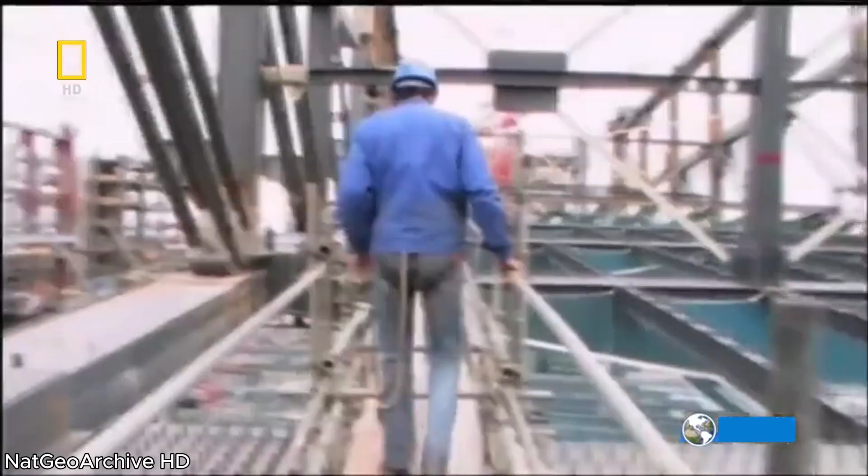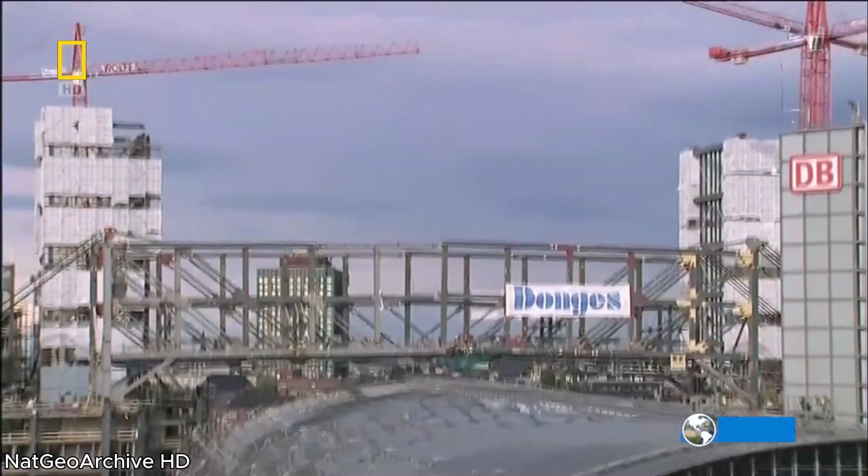Bernd climbs over unfinished beams, more than 40 meters out to the edge of his tower. From this precarious position, he can coordinate the movements between the towers. He gives the signal, and the towers are on their way down, only 5 millimeters at a time. A little up, a little bit over, a little down. Bernd checks to see if they're level. Voila! The lowering is now complete. Exactly as planned, only a 10-centimeter gap remains between the towers.

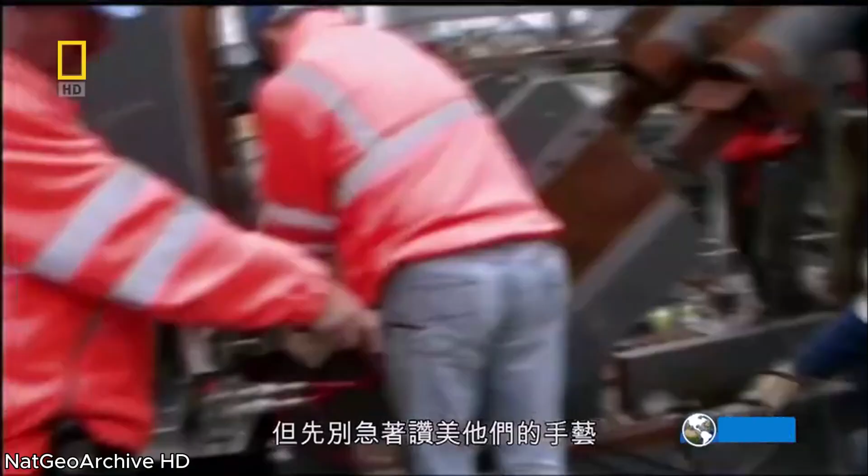To pull them together, hydraulic pumps, each pulling 100 tons, tow the two sides in tight, forming a bridge unifying north with south. But now is not the time to admire their handiwork. Before Berlin's trains can run through this station safely, there is still a lot of work to do. Workers must bolt the bridge sections together, make hundreds of welds, and lay over 1,500 square meters of flooring. Hours behind schedule, they know all this work will take them right down to the wire.

With the tipping stage complete, the foremen finally find a moment to relax. Bernd's not empty-handed. Super job. He knows when he's been beaten. But not everyone is celebrating, especially the architect.

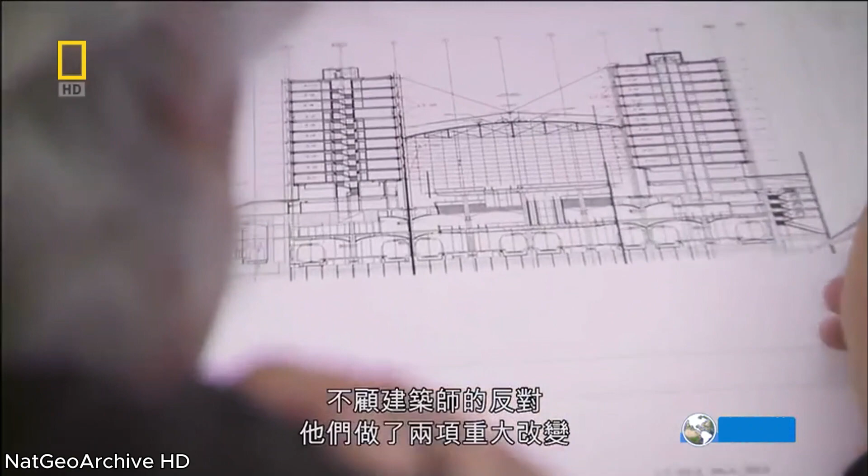In 2002, already years behind schedule, the Deutsche Bahn, the German rail company that owns the station, decided to take drastic measures to meet their World Cup deadline. They decided to alter some features of the design. Over the architect's objections, they made two major changes. The first was to the station's most noticeable feature, the glass roof. Von Gerkan's design had a 430-meter-long roof, long enough to cover the longest trains. The glass and supports were manufactured to cover the entire length. But before they were installed, the glass canopy was shortened, ending it 100 meters short.

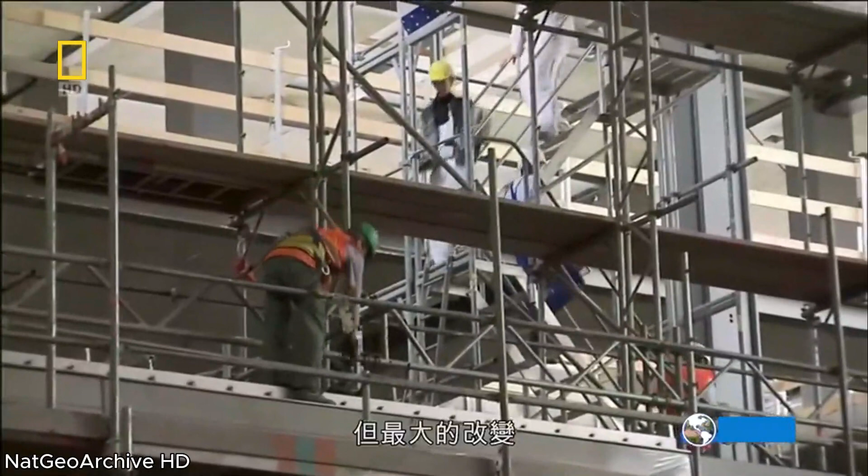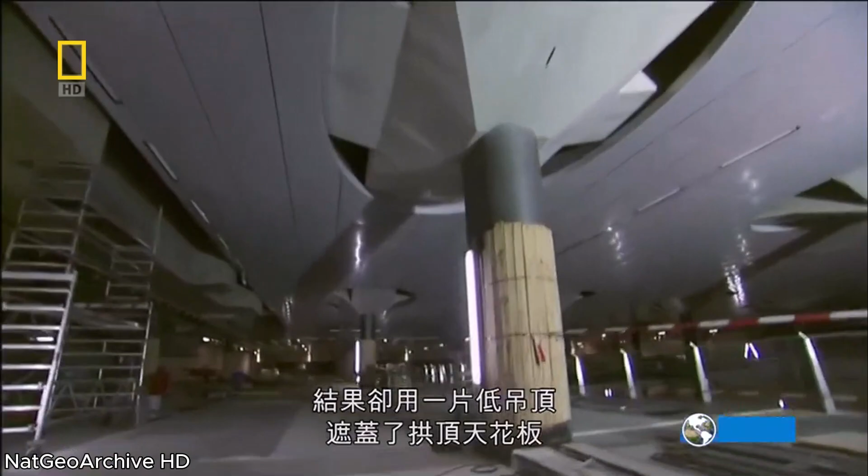But perhaps the biggest change is in the lower subway terminal, where light cascading down from the upper levels was supposed to reflect off a massive cathedral ceiling made of metal, casting natural light 5 stories beneath the ground. Instead, the great cathedral was covered with a drop ceiling. Like in a supermarket. Without any details, without any expression, without any charisma. The changes have saved the project time and money. That's how it is in big projects. You have to decide, do I want to meet my requirements, my time schedule, or do I want to finish every small piece of it?

But for the visionary architect von Gerkan, there are no small pieces of his masterpiece. I must say it was the biggest loss I ever had in my professional work. I, as architect, have built so many buildings, more than 200. Nowhere have things happened like this. Von Gerkan is so outraged he has now brought the case to court, hoping his vision may one day be realized, even if it has to happen after the station is built.

Out on the bridge, sparks bounce off the glass station as the welders kick it into high gear. This weekend's deadline is approaching fast. The crew works late into the night. Until finally, after more than 2 days of heroic engineering, the last weld is made. And once again, the trains start coming through the station. The impossible feat of building a bridge by lowering 2 towers has been a tremendous success.

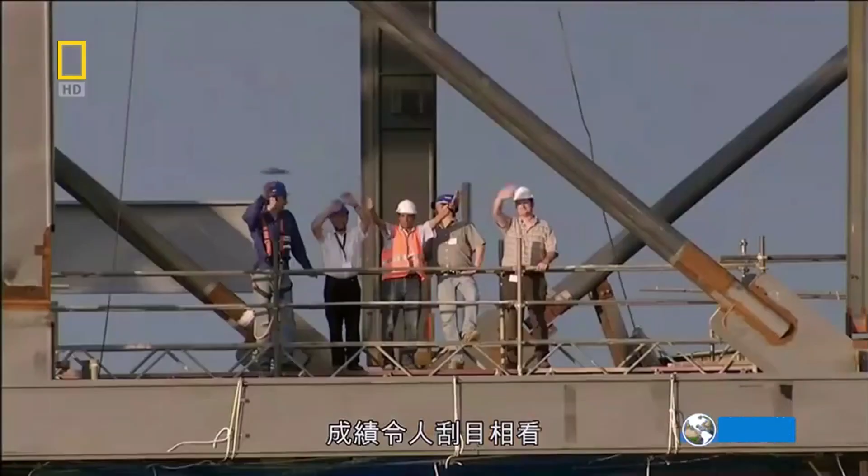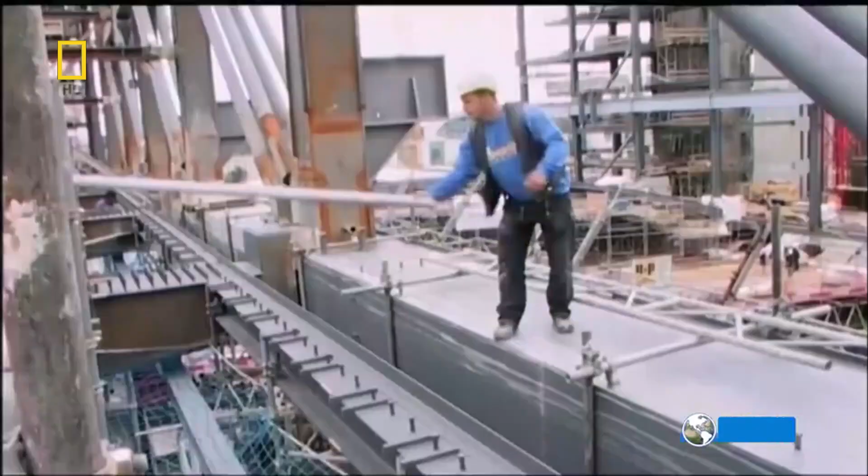But this crew know they'll only get 1 day off, because in less than 10 months, millions of World Cup football fans must travel through this station. So Tuesday morning, they start planning the tip-over of the second office tower. It is a race to the finish. Glass roof, tunnels, tracks, office towers, and even the landscaping. If they are successful, this mega train station will claim its rightful throne as Europe's largest, transforming modern Berlin into the center of Europe.